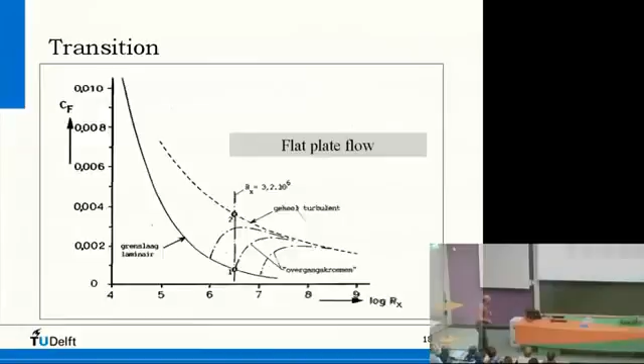I'll skip this one. A little bit hard to see, but what really happens in such a small area of this transition region is...

In the laminar boundary layer, there are some waves at a certain frequency that later on will give you turbulence. They're already present, and if the flow comes along over a flat plate, for instance, what you see here is some wavy character. So suddenly, somewhere in this laminar boundary layer, this wave gets bigger and bigger, and it moves with a certain frequency.

And then when this wave, this amplitude of this wave, is big enough, then we have transition. And transition...

will not take place suddenly, but somewhere in the flow you see those turbulent spots. They call it turbulent spots, here and there you see some small vortices coming up in the flow. And if you put a microphone inside this flow, then you would...

It sounds strange, but it's really the sound that you hear. A laminar boundary layer is just a sort of small, soft whistling sound. And then if you have a turbulent boundary, it's a rumbling sound. And somewhere in between, these small vortices, these turbulent spots, give you the idea that turbulence is coming on.

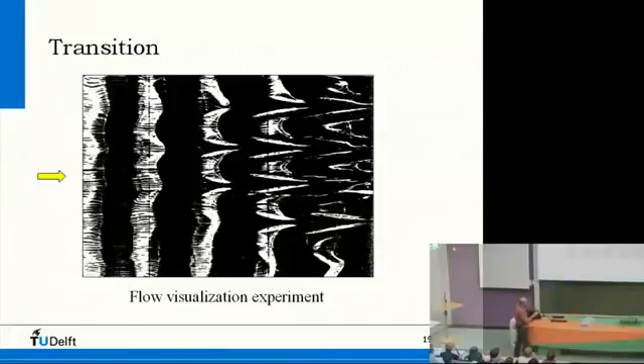That's what you see here: this wavy character, these Tollmien-Schlichting waves in the laminar boundary layer that grow bigger in amplitude as the flow goes along the flat plate. And here you see these turbulent spots, and here we have a fully turbulent flow. So what you see here are turbulent spots, vortex breakdown, and here these Tollmien-Schlichting waves.

So these Tollmien-Schlichting waves have a certain frequency, and this frequency depends on what kind of object it is. A flat plate is different than an airfoil. And if you would put a speaker here with a certain frequency, then you can just increase this amplitude.

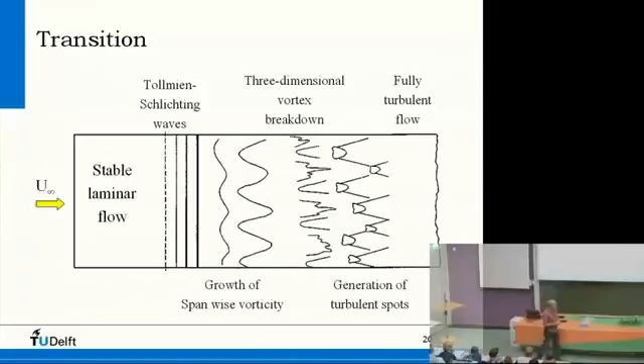So this transition process can be influenced by artificial means, by generating a frequency that matches the frequency of this wave, so that it gets bigger and bigger, giving you early transition, early turbulence. But also, you can influence this wave by putting dirt on it, for instance, or grit, very small particles of dirt. That can also influence this wave so that it gives an earlier turbulence.

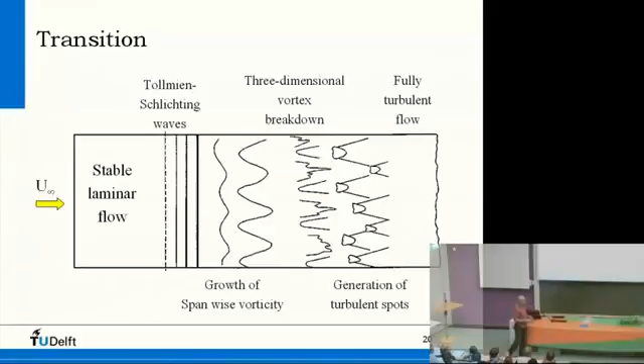Ludwig Prandtl did very fine work on this subject, also on wing theory and stuff like that. A very renowned scientist.

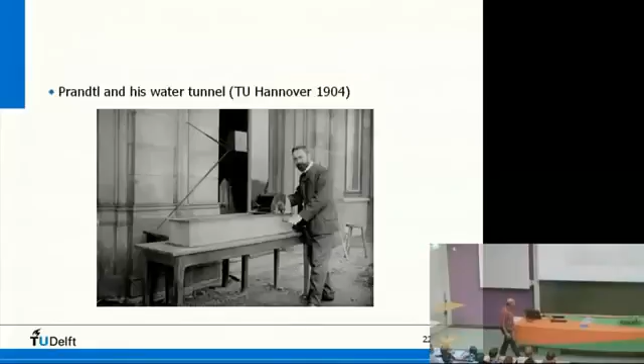And what we have seen is that the friction coefficient of a laminar boundary layer is lower than that of a turbulent boundary layer. So the turbulent boundary layer is much thicker, and it has a higher friction coefficient.

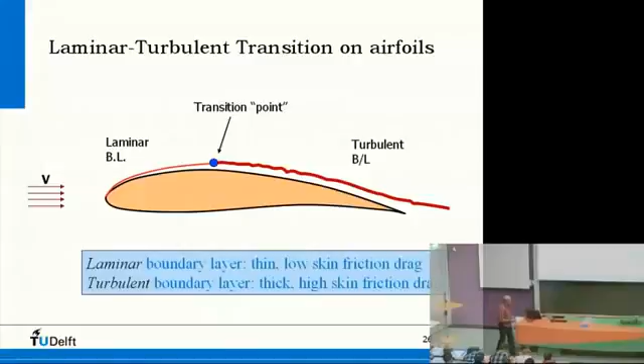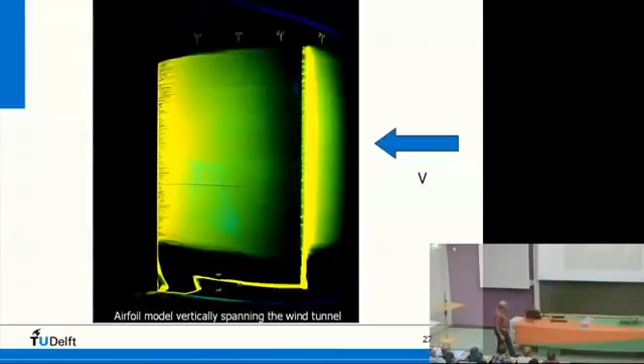So there's turbulence. It's a little bit difficult to see. Maybe I can lower the light a little bit.

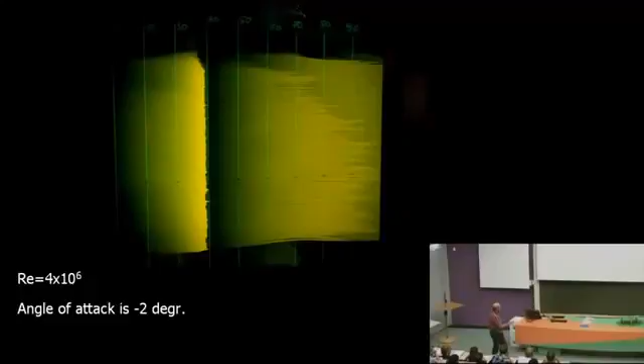This is another, more recent picture, and the flow comes from this side. This is the lower surface of a wind turbine airfoil; the other picture was the upper surface. You see that at a Reynolds number of 4 million, angle of -2, there's a transition location at 40% of the chord. The same you see here, this black area, is where the turbulent boundary layer starts, towards the trailing edge.

So this is again 40%, but if you then go to -6, you see the oil being swept away here, and the transition location is moving forward. The oil is moving in that direction, and the new transition location, for -6, is about 33% of the chord. So on this picture you can see that whenever you change the angle of attack, the transition location moves, on the upper surface as well as on the lower surface.

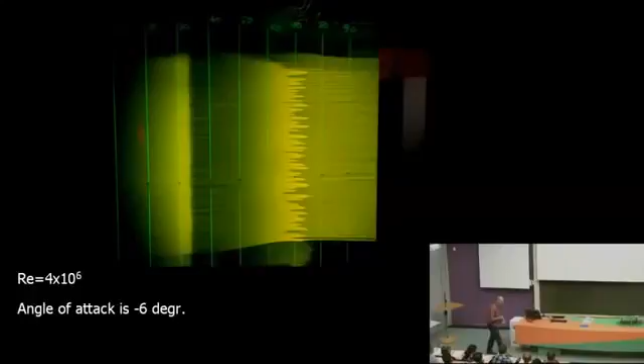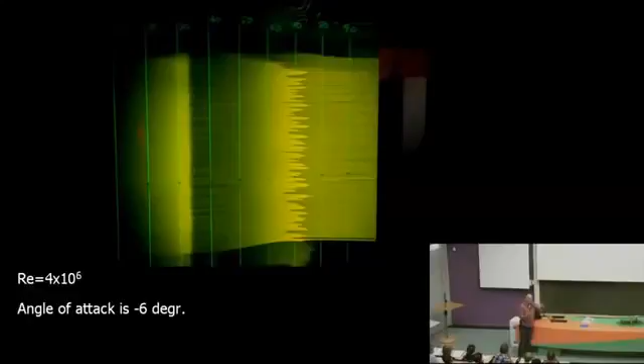And that depends on the form of the airfoil, on the pressure distribution. So you can play with that if you want to influence the drag of the model, because this is the laminar boundary layer and this is the turbulent boundary layer, and the turbulent boundary layer has a lot more drag. In this case, as the angle of attack goes to -6 degrees, the turbulent boundary layer gets longer, so you have more drag. If this happened on the upper surface, you would also have more drag because of increasing the angle of attack. So both on the upper and lower surface, the transition location is constantly moving as you change the angle of attack.

And this was attached flow, so there's no separation. This is just a laminar boundary layer and a turbulent boundary layer floating along the surface of an airfoil.

If you look at the lift as a function of the angle of attack, there's a linear relation between the lift coefficient and the angle of attack. At some point the turbulent boundary layer is very thick, and if you increase the angle of attack more, there is separation. The turbulent boundary layer cannot follow the contour of the airfoil anymore, and it separates, going straight to an undisturbed situation.

Because the flow is not so curved anymore, lift comes from giving a downward velocity to the airstream, which gives an upward velocity to your airfoil. Because there is separation, the lift goes down.

In this separated region, you can also make flow pictures, and then you see something like this. This is the leading edge, this is the trailing edge. Here is the laminar boundary layer, stopping at about 10 to 15%. Then we have a turbulent boundary layer, which separates and makes very strange patterns we call stall cells. It's a three-dimensional pattern, although it's a two-dimensional test between walls, with just an airfoil model stretched toward both walls, so it's two-dimensional in fact. But because of this separation process, you see all kinds of strange stall cells developing.

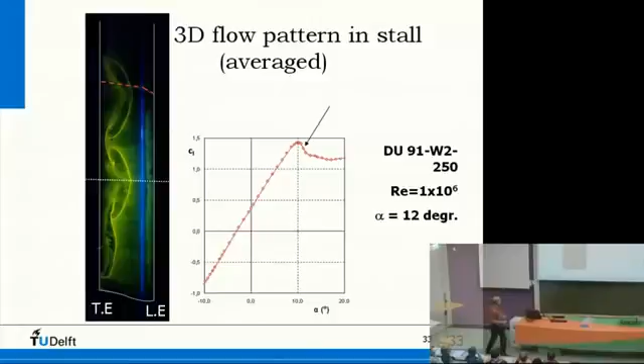The majority of the flow is, of course, turbulent. If you look at wind turbine blades, they have a very nice surface, but they rotate through the earth's boundary layer, and there are a lot of flies and bugs that collide onto the leading edge, creating a lot of roughness. So the initial laminar boundary layer that would be there becomes turbulent because of all the disturbance on the airfoil itself.

What you see on an airfoil like this, a laminar flow airfoil, is that you have a favorable pressure gradient. If you look at the pressure distribution along an airfoil, at some point you have the highest velocity on the airfoil, and like Bernoulli says, high velocity means low pressure. So there's low pressure somewhere on the airfoil.

But this low pressure has to go back up to the undisturbed pressure somewhere behind the airfoil. So there is a not-so-favorable, adverse pressure gradient between the point of highest velocity and lowest pressure, and the high pressure somewhere behind the airfoil. In fact, there is a force pushing all the molecules in the boundary layer back because of this pressure gradient.

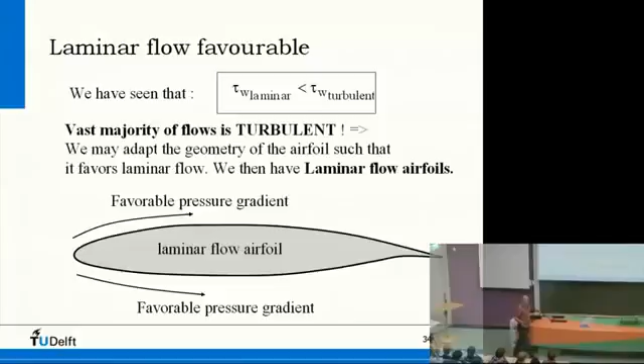At some point, if this pressure gradient is very high, the velocity goes down and down in the boundary layer, and at some point the velocity is zero at the surface, and then you have separation. This is a process of separation.

This is a calculation, but in much more detail. What you see here is, in fact, laminar separation. So it's not only that the turbulent boundary layer can separate, but if you have a low enough Reynolds number - very viscous flows, low velocities, low temperature air and so on - you also get laminar separation, meaning the flow turns turbulent somewhere in the air, not on the model itself.

And that is what you see here. This is a sphere, or maybe a cylinder, and a cut of that. You see that this laminar boundary layer is separating here, somewhere at the thickest point, and it makes a vortex.

The point is that because this vortex, this separation, is there, the flow is different at the upper surface and at the lower surface. And it's so much different that when this occurs here, there will not be a vortex there, and vice versa. So when this vortex is gone, a vortex will develop on the other side. I think Professor Bijl also showed you this picture of this vortex, this Kármán vortex street.

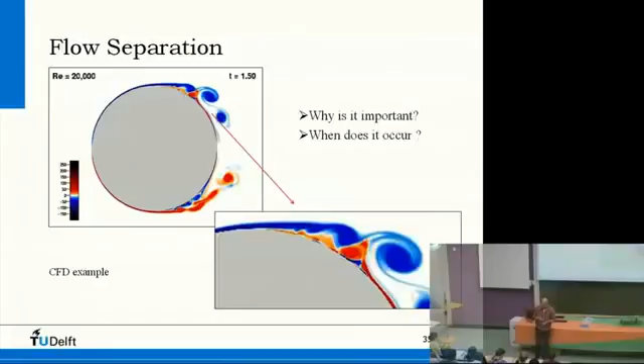And then the flow would go into turbulence. But if you could suppress it, or supply enough velocity to a laminar boundary layer, you could probably extend it a little further towards a longer chord position. But it's very difficult, because once you have turbulence, it's very difficult to go back to laminar flow again. So relaminarization is very difficult, and you have to prevent that from happening.

Okay, separation. You've seen this process before. Here we see it again. This is a boundary layer, and you see that you lose velocity, you lose energy, and at some point the velocity is zero. The next step is that there is a negative velocity here, so you have this vortex that gives you negative velocity, and the flow separates from the surface.

Got a question. You know shark skin — how can shark skin prevent the water from building up vortexes? How can shark skin influence the boundary layer to reduce or increase the vortices?

That is a very difficult question, since we have not yet talked about sublayers in the boundary layer. What I tell you here is that it's one boundary layer, but in reality there is a difference between the very, very small layer on the surface and the one above it, within the boundary layer. We will see something about the influence of roughness on the flow, and I'll show you in a moment. It's not the same, but the shark skin works a little differently.

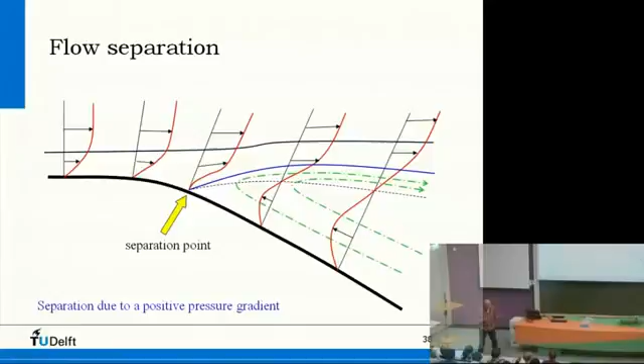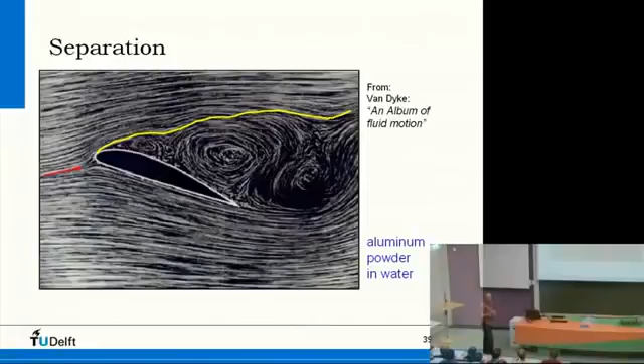So the velocity will go down, and you will see here the separated flow. Separated flow means there is a pressure plateau. A streamline will only be curved if there is a force acting on it — if it moves along an object, the pressure curves it, but once it separates and moves straight on, there is no force acting on it, so it's a straight line. What you see here is just a straight streamline, meaning a constant pressure. So this is separated flow, right from the 20% chord station.

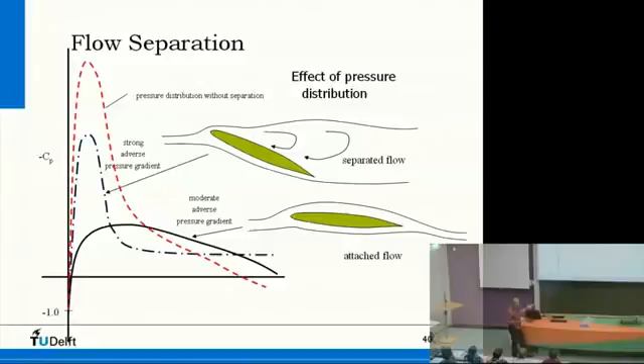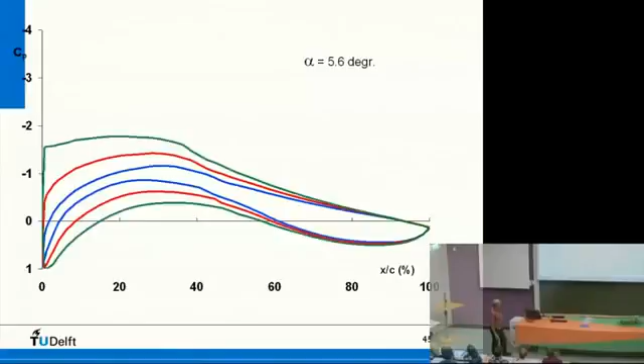DU stands for Delft University. With an angle of attack of 0 degrees, you will see this pressure distribution. At 5.6 degrees, it moves up. You see the CP, and this is the chord position. This is the pressure distribution for which the maximum lift coefficient occurs.

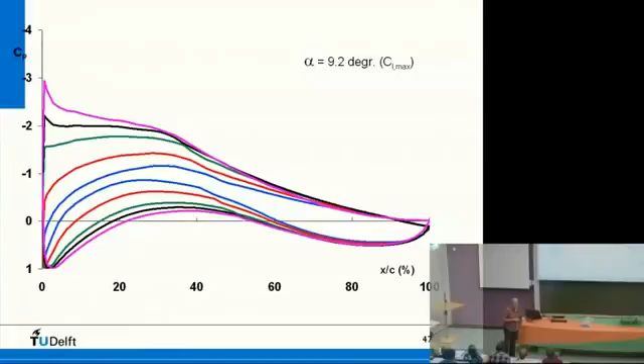If we then look at the transition location, which can be measured - I told you that the turbulent boundary layer can be detected if you put a microphone in the flow and listen to the rumbling sound. If you go from whistling to rumbling, then somewhere in between there is this transition location. And you can do that - in this case we did, and these are the transition locations.

You see that the moment you increase the angle of attack, the transition location moves forward. From 0 degrees to, say, 9.2 degrees, transition moves forward. And at that point, at CL max, you see separation starting at the trailing edge. At 92% of the chord, there is this straight plateau, and the separation point moves. If you go further in angle of attack, you will see this moving forward.

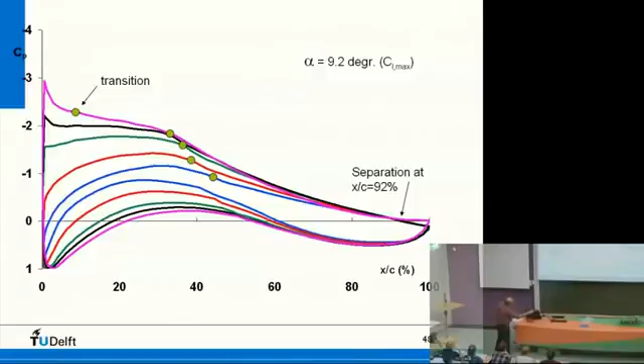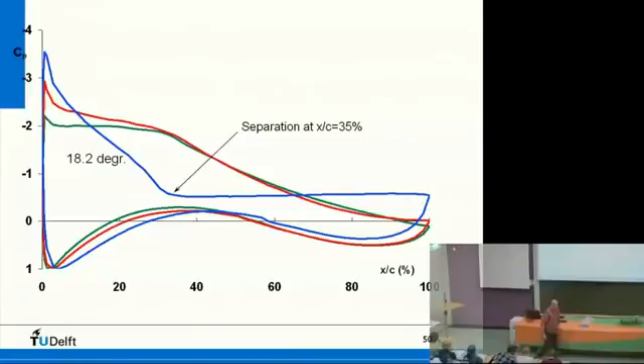At 18 degrees, we have separation around 35% of the chord. There's a pressure plateau here, which means a lot of drag, because this separation means a lot of turbulence, velocity loss and stuff like that. So it's very high drag.

Why in general do we not like separation? Because a separated boundary layer can influence the flow around all kinds of stabilizers, other wings, for instance. If you have a vertical tailplane, for instance, and you have separation at a large angle of attack, then flaps can get inefficient because of flow separation. So in general, flow separation is unwanted.

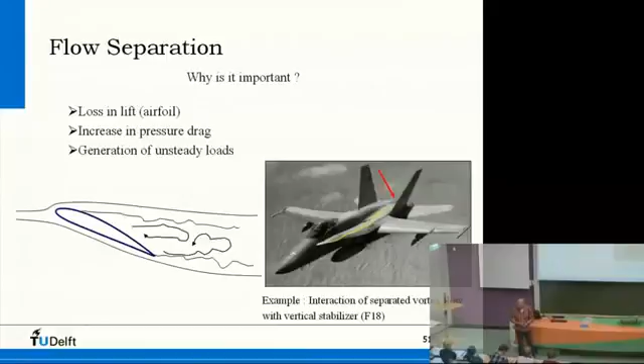If we look at a laminar boundary layer profile and a turbulent boundary layer profile, we see that a turbulent boundary layer profile has a lot more velocity near the surface, and that's of course why the friction is so high. But if the profile looks like this, there is a lot more kinetic energy there, because the velocity is higher near the surface.

If you talk about negative pressure or adverse pressure gradients - this force that pushes the molecules back - a boundary layer with this turbulent character has more energy to flow into the adverse pressure gradient, to get further on the airfoil despite this pushing back. So if a boundary layer is turbulent, it can reach the back of the airfoil, and a laminar boundary layer might not be able to do that. That's because there is more kinetic energy here.

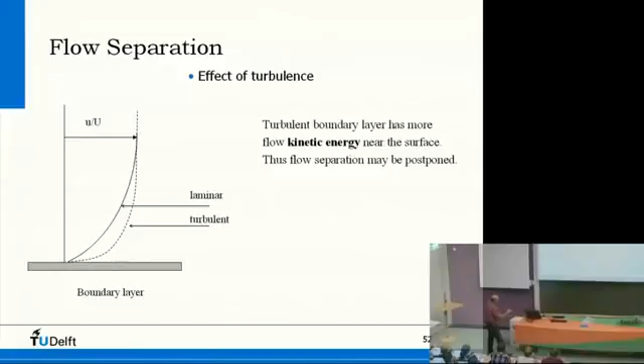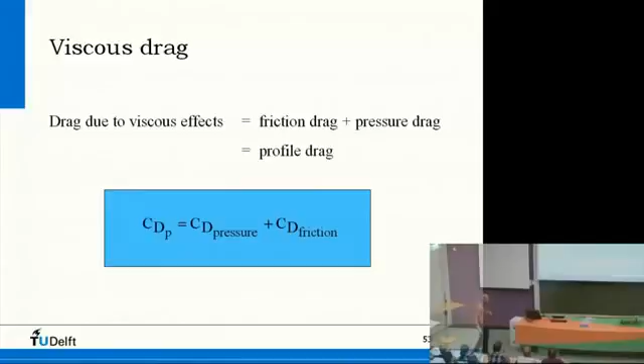If we look at the drag of an airfoil, we see friction drag and pressure drag, which together give you the profile drag.

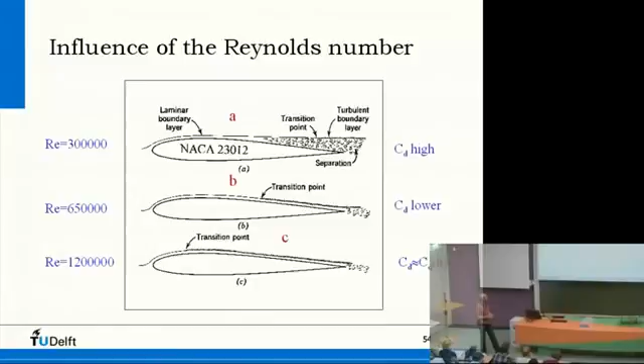And this kinematic viscosity is at standard conditions something like 15 times 10 to the power minus 6.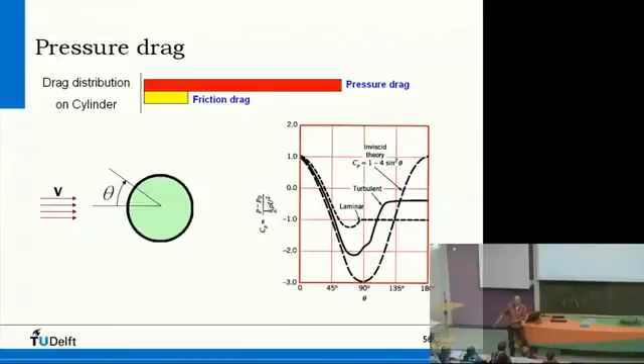What you see here is a pressure difference. Here we see a CP of 1, the total pressure, and here we see a negative pressure. So there is a pressure difference across this object, which means there is a pressure drag. There's viscosity, so we have viscous drag, but also a pressure difference between the back and the front — this is pressure drag, and it is much, much higher than the friction drag. So whenever you have a blunt object at the back, giving separated flow, the pressure drag is much higher.

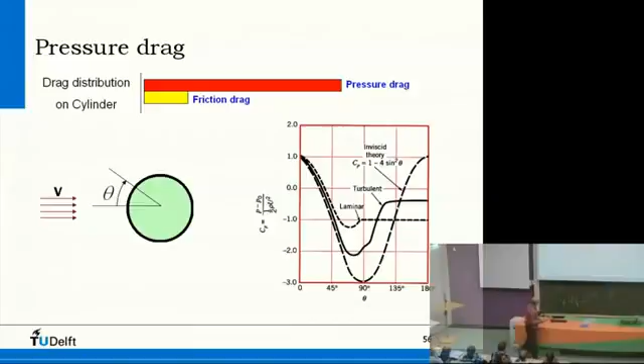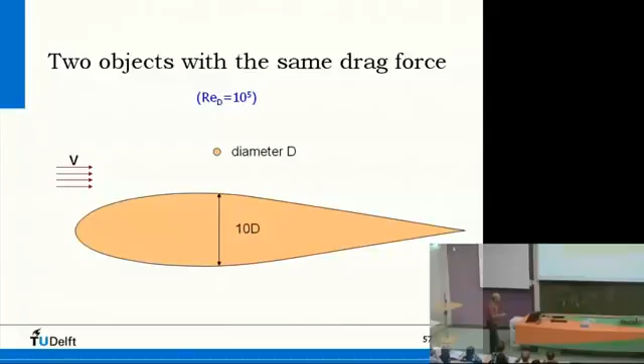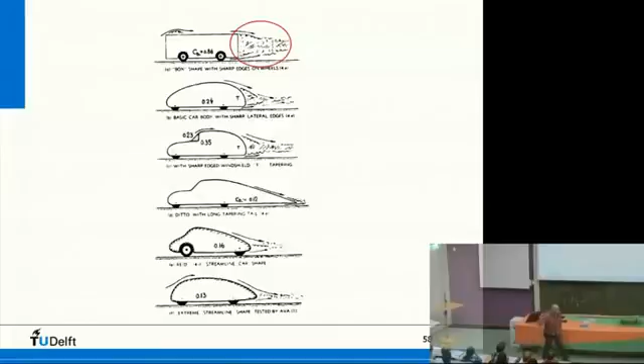So here you see how it works. This one is of course a little difficult — if you round a corner, the tail sweeps like this, so it's very difficult to drive, but anyway it has a very low drag.

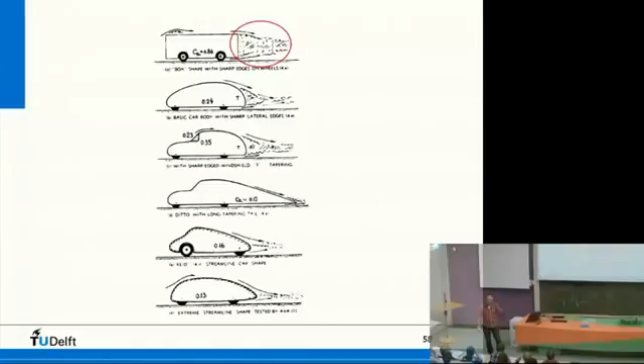Now if we look at a sphere like this — can you influence this by having air inlets in the front and letting air out in the back, an inlet supplying air to this dead air region? Yes, that's possible, although creating an inlet also creates a disturbance in the outer flow, which has its own drag. And if you have an inlet with a channel towards the back, that channel has internal friction too. So the net result may be complicated — with containers, for instance, you can't run a channel inside, so you might end up with a complicated structure giving maybe no drag reduction at all. This is a point of discussion and research for truck manufacturers, since they want to reduce fuel consumption, and reducing this pressure drag can decrease fuel consumption very rapidly.

At this Reynolds number, the flow turns from laminar to turbulent in the natural sense. So that's when it happens. This critical Reynolds number, when it is exceeded, then you have a turbulent flow right in front of the thickest point, and then the flow can round this thickest point and stay attached for a long time.

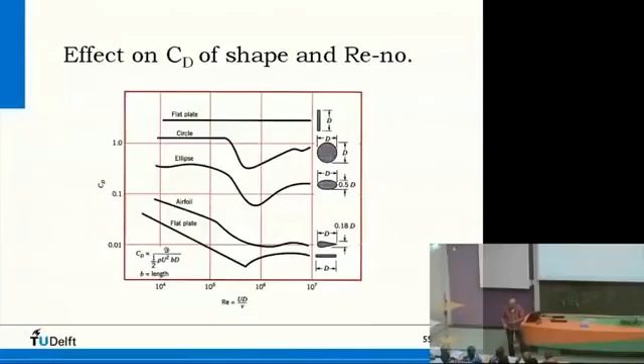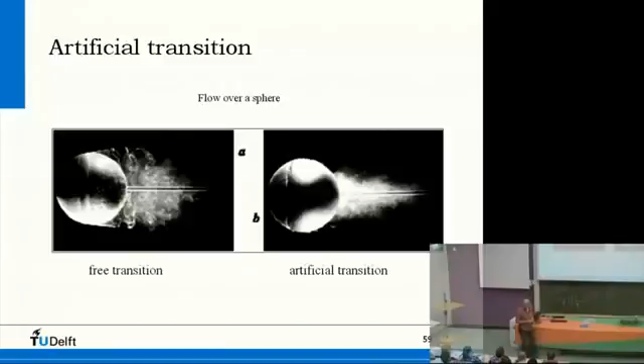And because of the fact that when you have a turbulent boundary layer this happens, by artificial means you can also try to reduce the drag of a cylinder or a sphere. Since you need a turbulent boundary layer, you can try to make the laminar boundary layer turbulent. And that's what happened here. You make it turbulent by putting something there, and it can be a ring or whatever disturbance you have, and then it's turbulent, and this is happening.

No wonder that you see a lot of applications of this phenomenon. In the first months of the golf sport, they found out that used balls came much further than the new ones because they did not have any dimples. So the used balls had scratches and stuff like that, and they had an earlier turbulent boundary layer, and they came in the first part of the flight much further than the laminar stuff. So they found out that there should be something like 328 dimples, or I don't know how many, but maybe if you have nothing to do, you could count them. And the form means these are circles, but they also have octagons, and whenever it disturbs the flow in a good way, then...

But okay, so a smooth sphere is laminar, and a rough sphere or a rough cylinder is turbulent, and it gives a lot less pressure drag. Well, you see that with baseballs as well, tennis balls, those hairy tennis balls, that's the same.

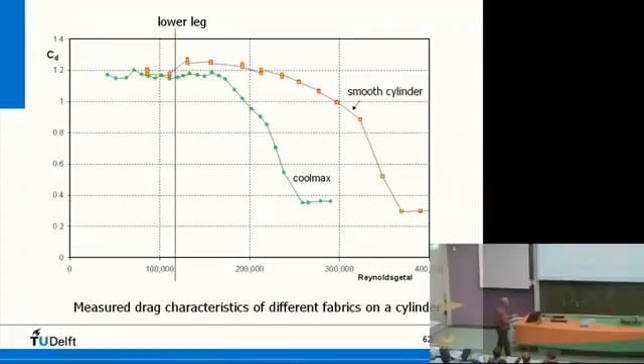And this is what happened. Here's the CD, here is the Reynolds number, and if you have a smooth cylinder, then in the natural sense the drag goes down like this. Just by increasing the velocity—because we have just one cylinder, one situation, air, same temperature—we increase the velocity, and by that we increase the Reynolds number. It goes down here, so the critical Reynolds number is somewhere here.

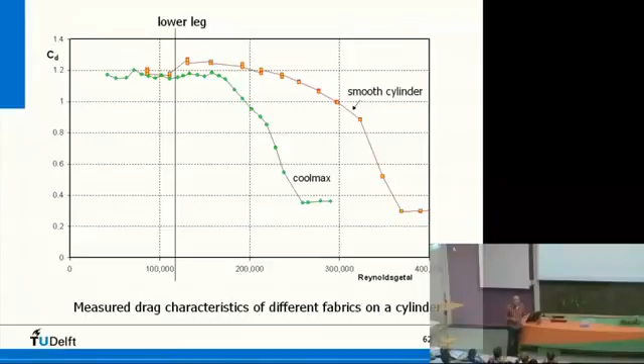But if you take this Lycra stuff, the material is Coolmax, this is just a cylinder to look at. And when you take the Lycra, you go down like this. But if you look at the lower leg, the average Reynolds number of the lower leg is like this. So you have to do something to get to a low drag.

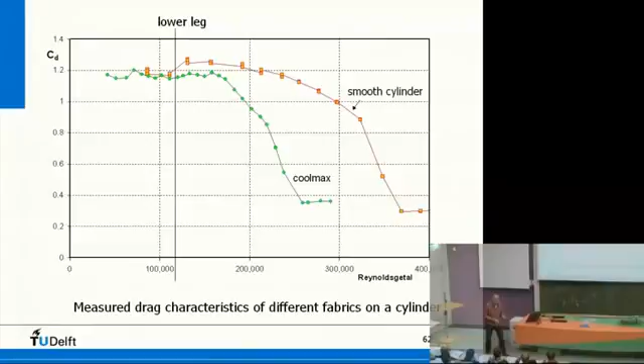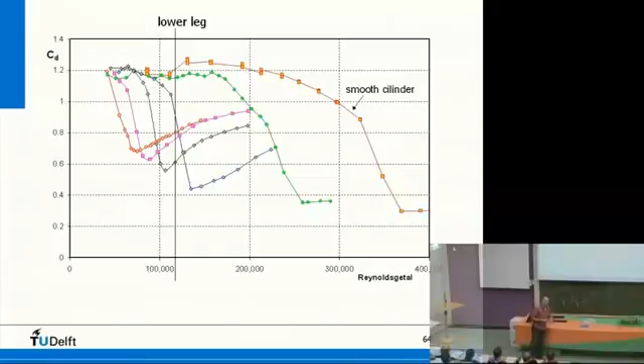Well, you can do that by not taking a very smooth cloth, but a cloth with roughness. And then you have these characteristics—rough cloth, right? So there are various types of cloth you can use to tackle the flow. The problem is that you cannot go as low as in the natural sense. So it will cost you. The moment you do it artificially, it will cost you the very low CD. So all in all, you cannot come lower than this.

Yeah, there's a question? Does it also work on human skin? The moment you have hairy legs, then it works. Yeah, it does. And the nice thing is, for cycling it does too. So for cycling you should have hairy legs. But what they do, because they get massaged every now and then, they just shave the legs. And that's bad. But yeah, well.

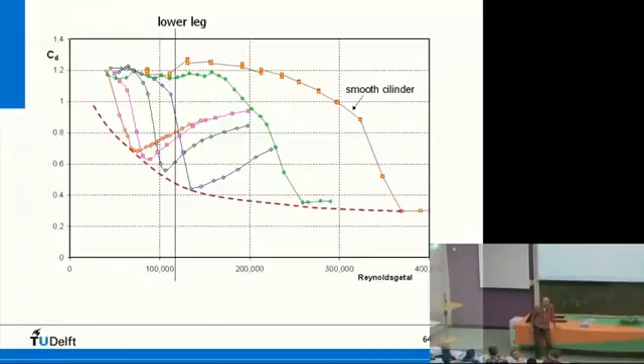You're thinking of women's cycling. Yeah, yeah. Okay, let's move on.

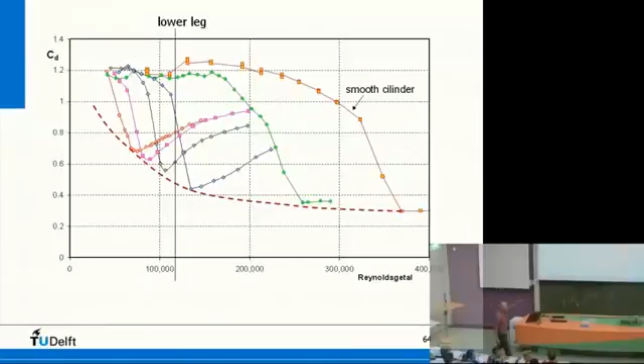So when you apply different sorts of cloth, you can have this effect. If we put the strips on, these zigzags, then you see something like this: Coolmax plus strips. This is this piece of cloth here, and if you put strips on both sides of the cylinder, then you see this.

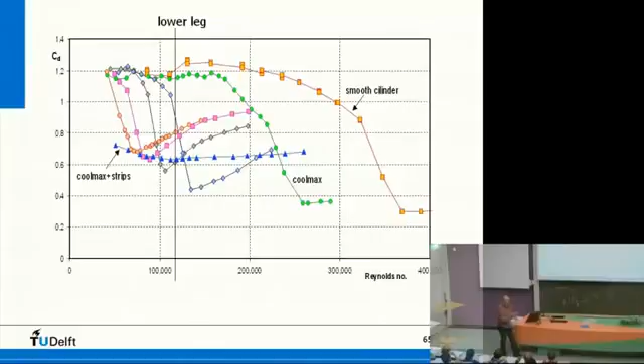Which means that you cannot go as low as this one, but across an entire range of Reynolds numbers, you stay very low. So if you are a designer of this type of suit, and you would like to use a certain roughness, you have to know exactly what the average Reynolds number is at which they skate, to apply this one, because this one has a very peaky character. If you do not know so much about these circumstances, then you use this, because this is constant over an entire range of Reynolds numbers.

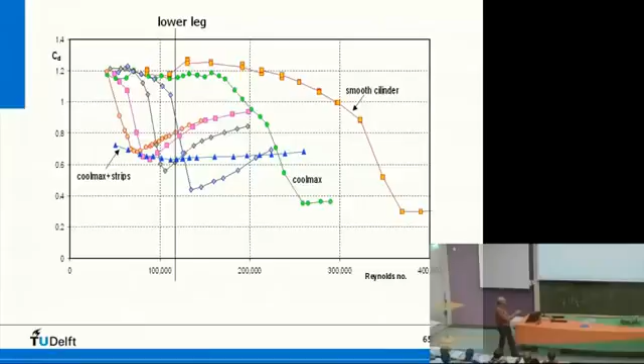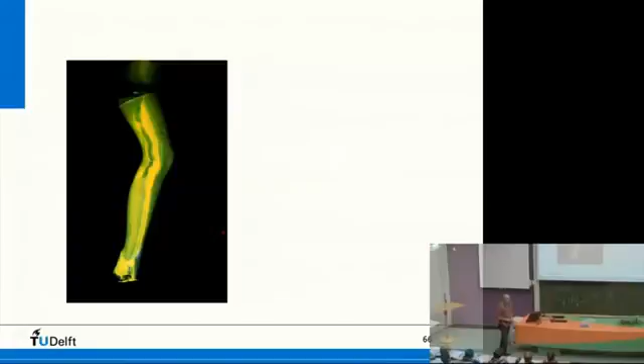You cannot see it now, but if you look at the pictures closely, you see stripes that go that way. So there is backflow in the wake because of these high vortices. There's backflow in the wake. Here's the separation line. And if we look at the leg with the strips, you see here it is, about 30 degrees from the front. Then you see those stripes here—these are the vortices that come from the strips. And the separation line is there.

So the difference is this.

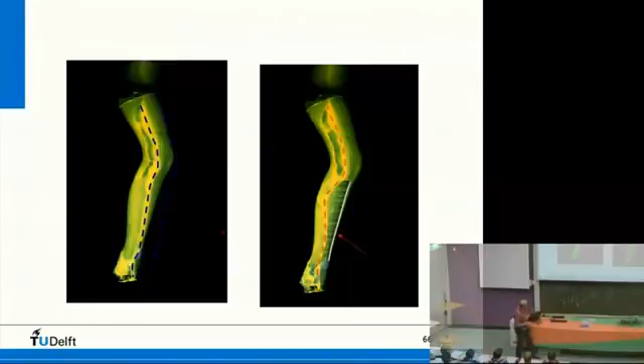The upper leg has no strip, same as before. Why don't we do the upper leg? Because it changes position so much - if you do a skater move, it goes like this. So the lower leg is mostly in a frontal position, while the upper leg is more difficult to track. That's why we put the strip on the lower leg first. But this difference is huge if you look at the pressure drag.

Gianni Romme was a famous guy, and he skated 8.4 seconds off his world record at the Nagano Games - there he is, 6:22. So this was the gain he had relative to the year before.

If you do a calculation, what you can gain with these lower legs that have the strips is about 4 to 5% of the total drag on the skater. If you look at the skater's drag, 80% is aerodynamic drag and 20% is ice friction. This 80% depends on frontal area, which is why they skate in that crouched position and not upright. So frontal area is important, but because of that position, the legs form a very big part of the total drag. That's why doing something about the legs can get you this 4 to 5% off the total drag.

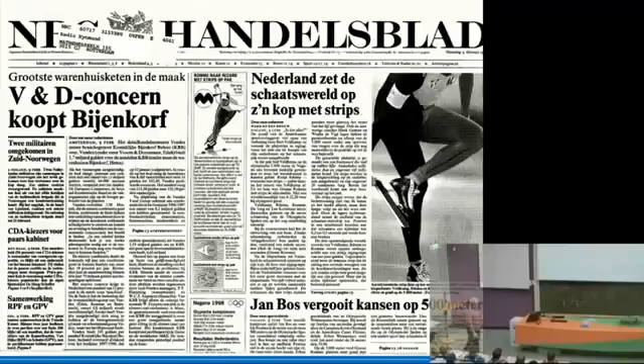Zigzagging strips give skaters wings.

Romme leads stayers to a new era.

The Herald Tribune: speed skaters make history.

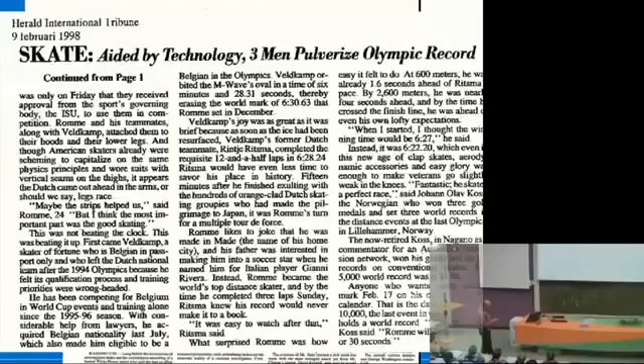Aided by technology, 3 Men Pulverize Olympic Record. Herald International Tribune: stripes help, and so forth. Dutch feat borders on phenomenal.

Well, it was a big success. Why was it a big success? Because nobody had thought of this application before. It was an innovation that had existed for many, many years prior, in fact - just like the clap skates, where the blade isn't all attached to your shoe but can flap. That existed for many years, and at some point people took it up and applied it, in this case in sports.

The nice thing about this application was that aerodynamics was put on the calendar again. Aerodynamics in sports gained a lot of attention, and Nike picked that up, and for the next games - that was Sydney in 2000, I think.

They came up with a full bodysuit for Cathy Freeman. She was already a fast woman, of course, but then they thought of this full bodysuit with a certain type of cloth. The roughness of it, nobody knows, of course - they kept that secret for a long time. But this is an application of the old Prandtl discovery that you have pressure drag and that you can reduce it.

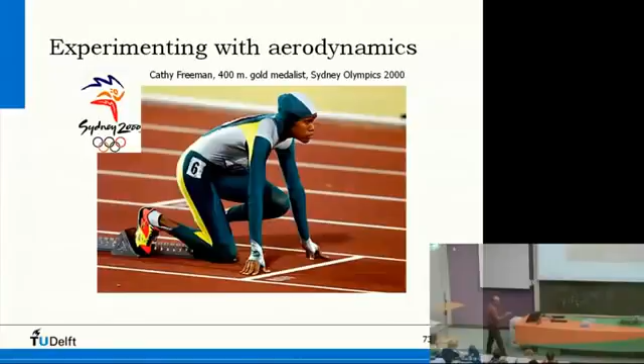Okay, so if you look at skaters right now, most of them don't use any strips - only some Dutch skaters use the strip on the head. Why is that? Because the effect of the strips is already built into the roughness of the cloth of the suits, and mostly it's Nike that sells these suits. But in general, they have done nothing on the head. If you do some measurements, there is still some reducing effect on the head if you do something about that - it's a sphere, more or less, and it works.

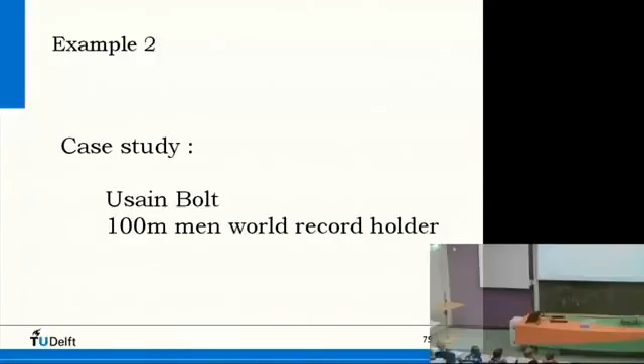Okay, and then the last case study: Usain Bolt. Just to show you how you calculate the effect, if it works or not. Usain Bolt is a good athlete, of course - he runs the 100-meter men's world record. He's a world record holder.

World record dates from 1 year ago, I think, Berlin.

If we look at the measured effect of these strips, or rough cloth, then on the lower legs it's about 3 to 11%, depending on size. Strips on the caps give 0.2 to 6%. Suppose we take something like 5 to 6% drag reduction on the lower legs.

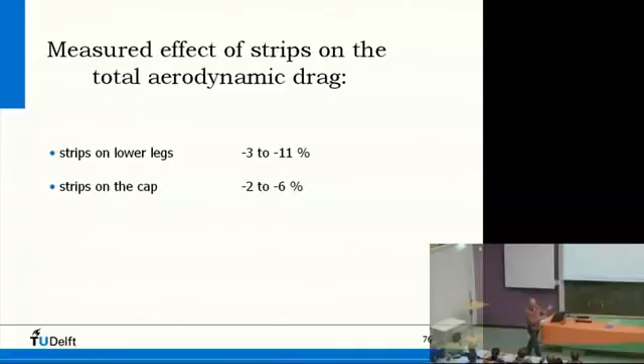Apply that to an athlete like Usain Bolt. Here we have him, this is the world record, 9.58. And mind you, look at his hands, he runs like this, not like this, because that gives a very low frontal area. If you run like this, there's a big frontal area. This way, you just cut through the air. So all these sprinters do that.

So here he is. Let's look at the power he needs to get this fast. The air density, if you look at the temperature and barometric pressure, it was 1.20. His length is 1.96, his mass 86 kilos, and his total CD times S is 0.82.

If you look at the drag force, it's CD times half rho v squared times S. CD times S is, in general, what you are looking for. So CD times S is 0.82, and his legs are part of that, so it is 0.246 CD times S. So it's a sort of drag coefficient type.

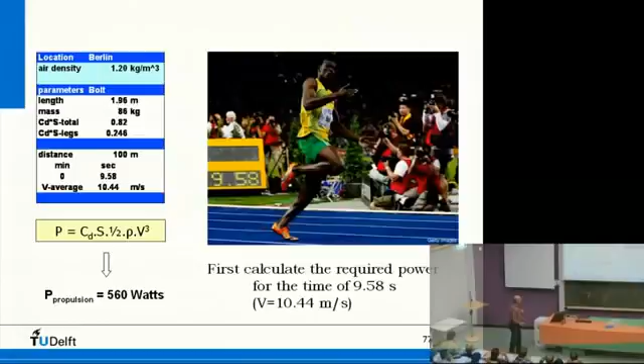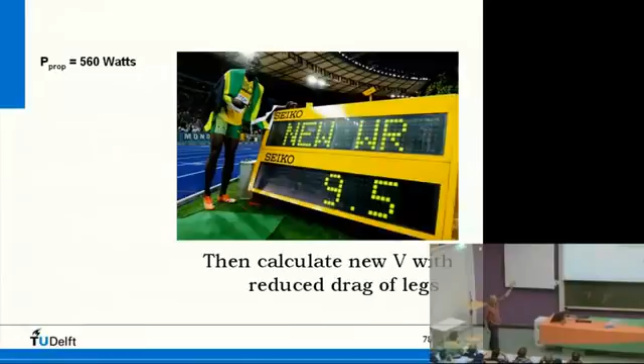If we reduce his drag by 6%, the drag of his lower legs, then we see like this. This is the power that he needs, the same power. The air density is of course the same, and everything is the same, except the CD times S of the legs, which is minus 6%.

So what is the velocity he gets with this power and this CD times S? CD times S appears here. It's 10.479 meters per second. So that's 9.54 seconds, which is 4/100ths of a second better than the world record, without doing anything except wearing a suit which gives his legs lower drag.

I'm not sure if it's allowed or not, but this is a sort of calculation you can do. It's a tempting calculation, also for manufacturers of suits, maybe. Okay, that's it.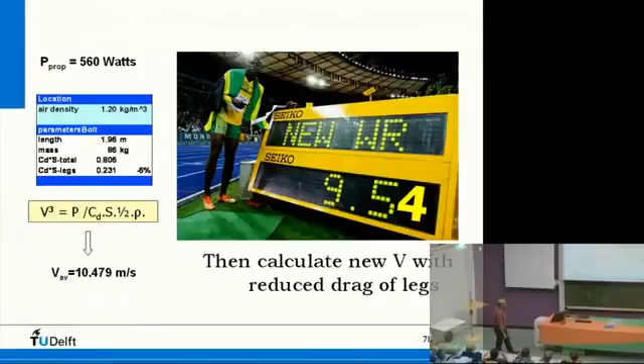Friday, next Friday, I think Hester will be here as well.

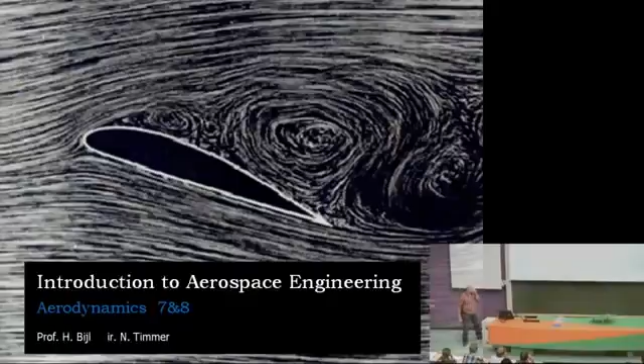Of course, then you can compare the flows. Everything that counts for the wind tunnel also counts for free flight. The Reynolds number says something about the velocity times a certain characteristic length. For wings, that's of course the chord. So velocity times chord divided by something that says anything about the viscous flow.

Honey, for instance, is very viscous, so this kinematic viscosity, nu, is very high. Gases, of course, are very non-viscous. So these ratios of parameters, if they are constant, then you can calculate with the same forces. Very convenient for wind tunnel measurements.

If you look at the flow around a model, a flat plate, an airfoil, whatever, first you have a sort of laminar flow, so very smooth layers of flow inside the boundary layer, not very turbulent. At a certain Reynolds number, you don't see that laminar boundary layer anymore. You see a turbulent boundary layer with a different shear force, a different friction coefficient. Somewhere in between there is a layer of transition, a transition point, we call it in general. If we talk about airfoils, we talk about the transition point.

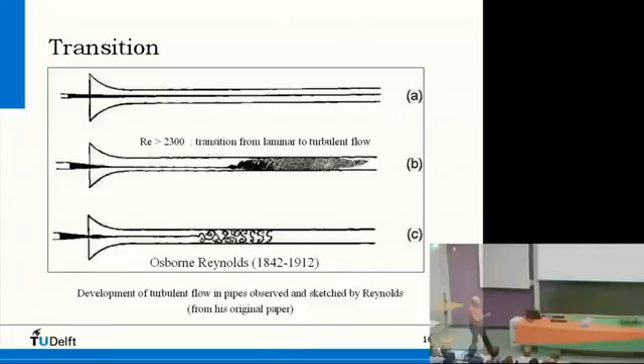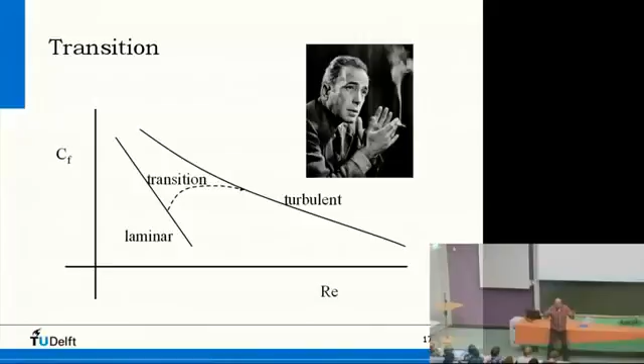Then he came up with his Reynolds number, saying that whenever the Reynolds number is constant between two configurations, two setups—for instance a wind tunnel and free flight—the ratio of the mechanical forces, the mass forces and the viscous forces, are the same in both situations. So you can compare both situations.

This is very nice, because if you want to do wind tunnel measurements with a certain chord, and you want to replace that chord in the wind tunnel but don't have a big wind tunnel, so you must use smaller chords, then if you keep the Reynolds number constant, you've seen this works.

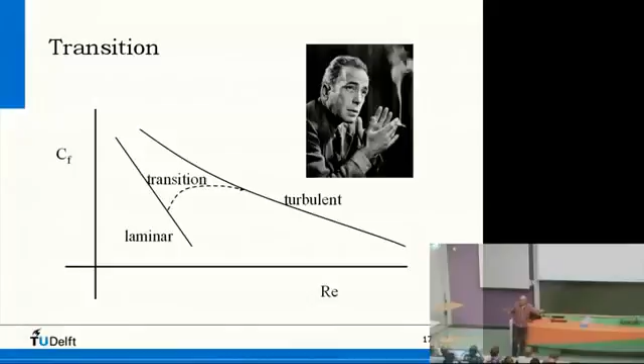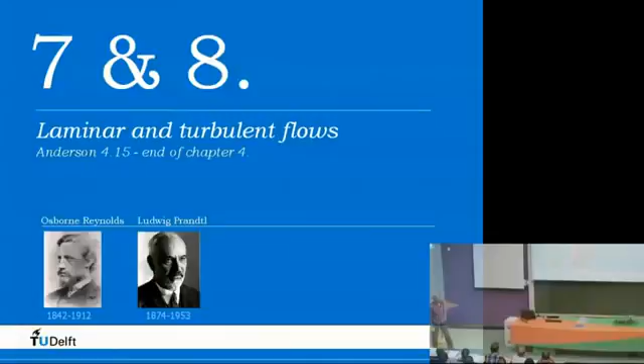I would like to mention them because Osborne Reynolds and Ludwig Prandtl made great contributions to the aerodynamics we know today, so recent aerodynamics. In times when people did not live too long, these guys were quite old for the era they lived in. So I always tell my students that if you want to get old, you have to study physics, because these guys were all physicists, and apparently that gives you a long life.

So it's about viscous flows, laminar and turbulent boundary layers. You have read all about that, maybe heard all about that from Professor Bijl.

This is a nice picture, the paradox of D'Alembert. D'Alembert was a French physicist who studied the flow over balls, spheres and cylinders, and concluded there was no drag—the resultant force was zero. But when he did the measurements, he saw there was drag. Of course there is, because there's friction, but his calculations did not include friction.

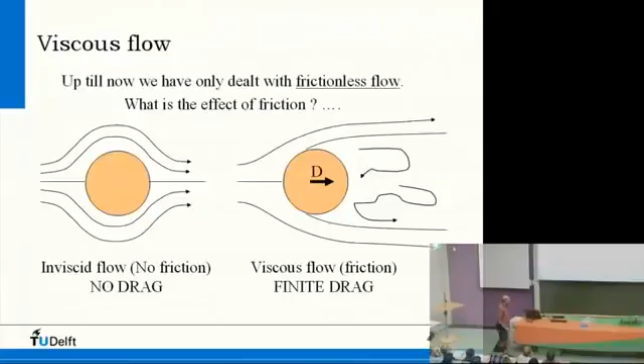So the pressure here is the same as the pressure there, and if you reach that conclusion, of course there's no drag. But the biggest force acting here is the pressure drag—so much more than viscous drag—that there's a very high drag force on a sphere or cylinder. This was called the paradox of D'Alembert, because he saw there was drag and couldn't calculate it. In due time people could do that, but in D'Alembert's time, some 200 years ago, that was impossible.

So in real life there is friction, and you will see that there is friction, but not only friction—also pressure drag.

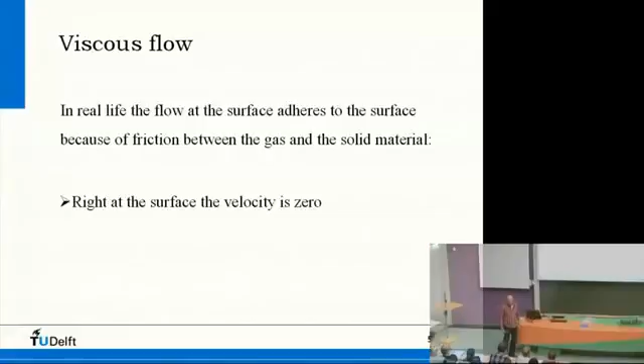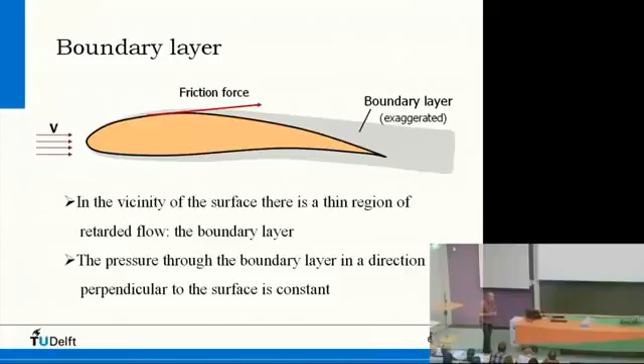Inside the boundary layer, because there is friction—and recall how Bernoulli's law was derived, excluding friction—since there is friction in the boundary layer, you cannot calculate with Bernoulli's law there. It's not valid. I'll skip this since you've seen it.

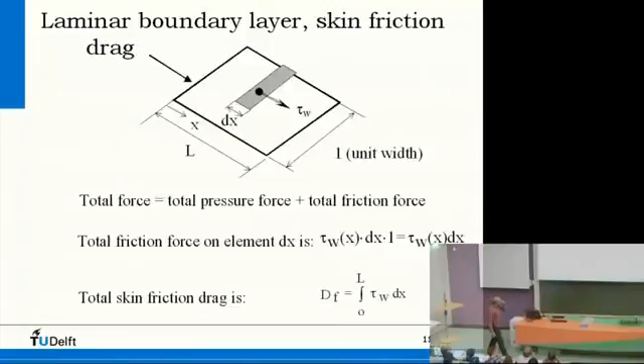Osborne Reynolds—he was the guy that looked very...